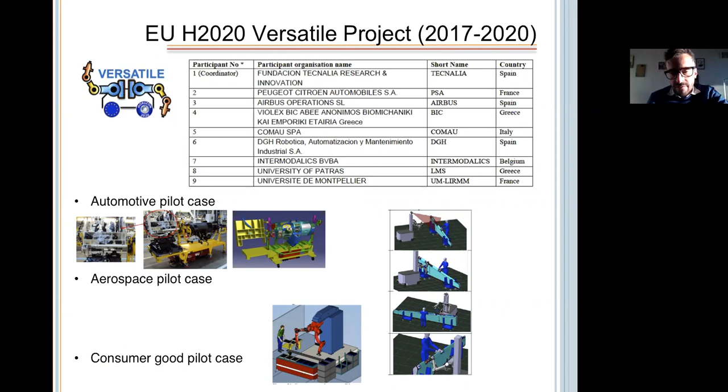In this context, we designed this robot, called BAZAR, which has top-notch sensors and actuators in robotics.

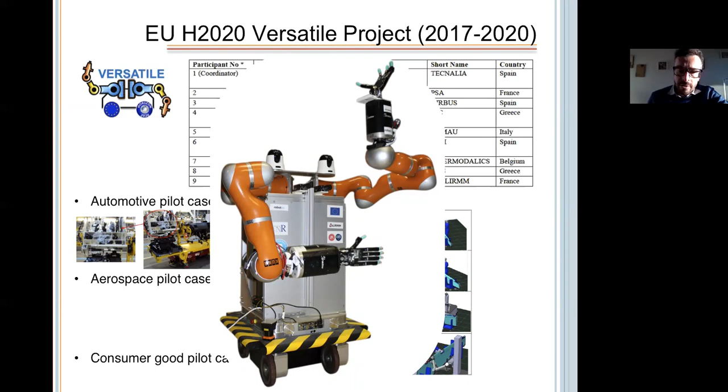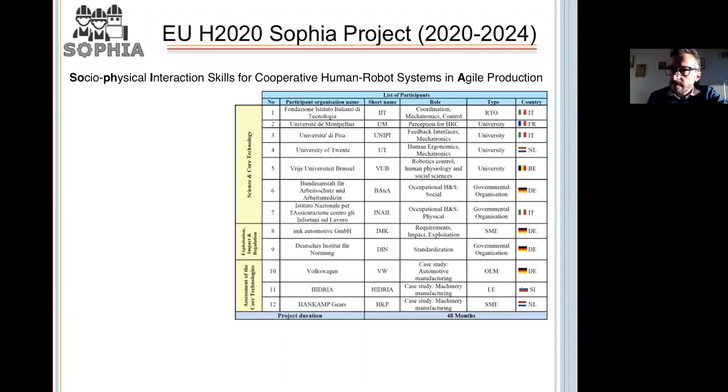Then after that, we had a second European project, which started in 2020, called Sophia. The acronym stands for Socio-Physical Interaction Skills for Cooperative Human-Robot Systems in Agile Production. This project has 12 partners and is coordinated by the Istituto Italiano di Tecnologia, IIT, in Italy. This project is more human-centered than Versatile.

Here the idea is to try to understand when humans have issues at work, such as psychophysical problems, and to try to have the robot help the human in an industrial scenario. So the robot becomes an assistant. Specifically, we address this with 3 kinds of systems: wearable suits which can detect pain, for example, on the human; wearbots like exoskeletons; and cobots, which is more what we address at Université de Montpellier—collaborative robots meant to work with the human. This is a bit of what I will speak about today.

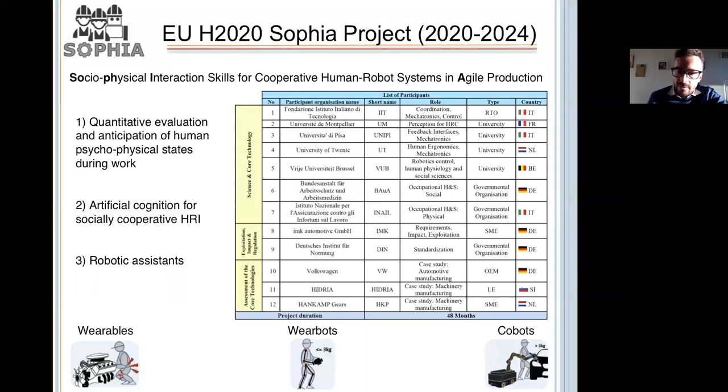So in this work, I will present how we use these devices to enable the robot to manipulate objects and interact with humans. We will show this specifically for each sensor, but we will also show some works where we have used multiple sensors, for example, vision and force together, or force and touch together.

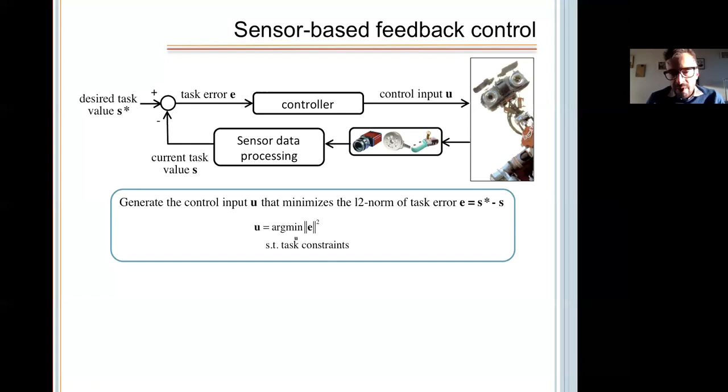It turns out that most of these controllers can be designed by the following paradigm. You just need to generate a control input U, which minimizes the L2 norm of the task error. So your controller should be the U, which minimizes E square under some task constraints. This is a quadratic optimization problem, and it has been recently shown in the robotics community that most problems actually are of this type.

I hope you see my mouse. Otherwise, let me know. And this is the current velocity coming from the robot. And to address this problem,

Of course, in general, you have some constraints here, so the problem is a bit more difficult to solve. But here you can see clearly that this problem is a quadratic programming problem, just as in the blue box.

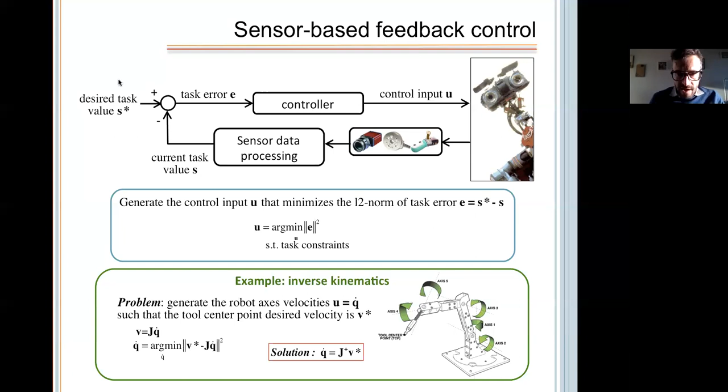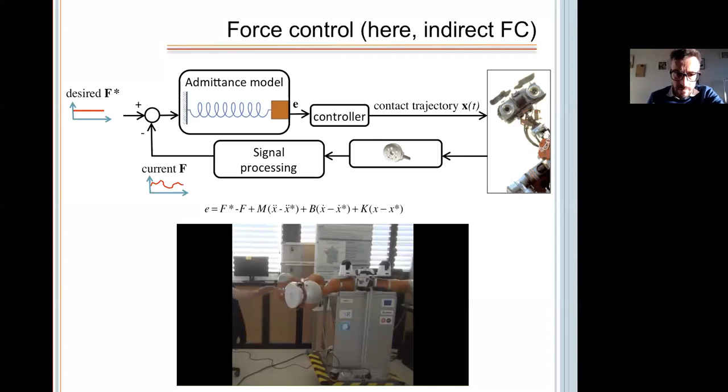And since signal processing with these sensors is very challenging, there are some difficulties: there is a lot of noise, modeling errors. You need to calibrate these sensors when you buy them, and it's very difficult to obtain repeatability. There are often hysteresis and other fancy nonlinear behaviors.

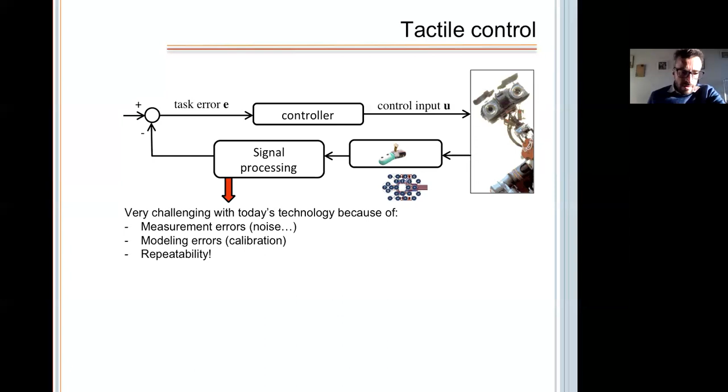So nowadays, if you want to use tactile for control, you would mainly use it to trigger some decisions. I will show some work on this, basically using it as a button for the user. Even for this you need a coarse calibration, but maybe you can just threshold some signal and understand if the person is pushing the button or not.

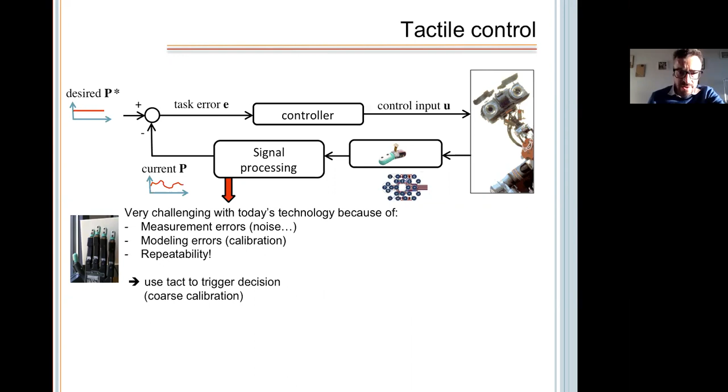But if you want to actually close the feedback loop with a desired pressure, for example, and the current pressure that the finger feels, this is today quite difficult because of the signal processing issues I mentioned. I don't think there are many works that do this today. Instead, what is more commonly done with these tactile sensors is object recognition, for example using machine learning, as I will show later on. This is something we have done in Montpellier as well.

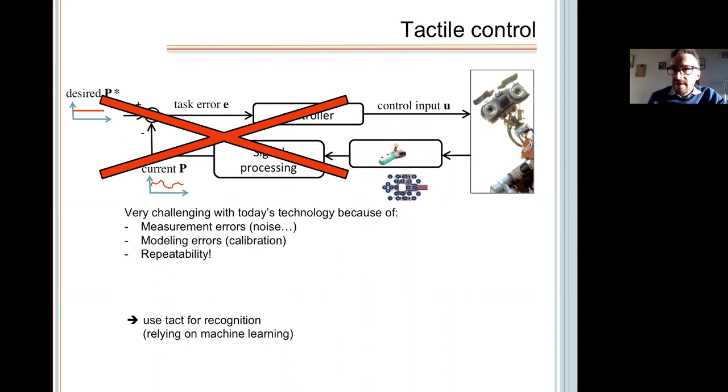Okay, so now let's look a bit - these were the fundamentals you will need to understand my talk. Now I will speak a bit about the application field, which, as I said, for both European projects, Versatile and Sophia, was the factory of the future.

So the factory of the future, the goal is to bring in some robots in the factory, in particular to reduce the ergonomic problems, which are, for example, the back pain and other kinds of stress which human workers feel now. This is a very relevant problem in the European Union because nowadays the highest cost for the health system in the EU is from work diseases, including burnouts, but also a very important part is musculoskeletal problems due to bad posture in the workplace.

So the robot should help the person when they are going to do some bad movements, but at the same time it is not possible, and also not in the intention of the designer, to replace the human, because the human has unique adaptability and precision skills. On the other hand, the robot can bring in power and speed.

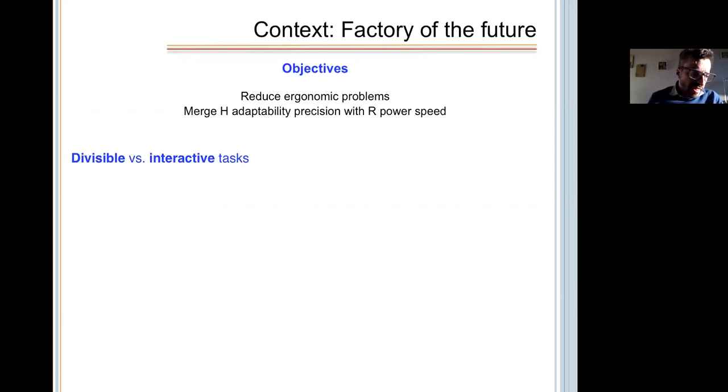So in the factory, we can distinguish between two types of tasks: divisible and interactive tasks. In this drawing, you see it quite well.

On the left, the robot and the human are divided, and on the right, they are interacting. Within this second class, you can also distinguish if there is physical interaction, meaning there is desired or undesired contact between the robot and human. Or you can push this forward and talk about physical collaboration whenever there is desired contact made to achieve a common goal. For example, in the photo here, the person is handing over an object—this is a form of physical collaboration.

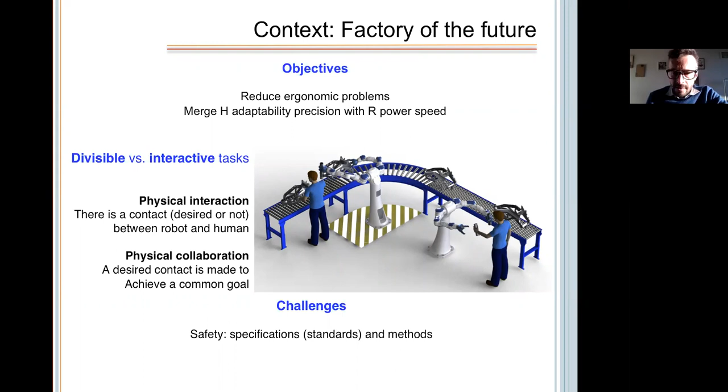In this framework where we want to design such robots, we have three challenges, which are both scientific and engineering challenges. The first one is that you have to have a safe robot. This is really the prerequisite of any robot working with humans or in human environments. For this, we have to follow the standards and design methods which can be accepted by society.

The second aspect, which is very important, is that the robot has to recognize the intention of the human—understand what the human wants to do. This is not trivial at all, because humans are unique, and each human has their own way of communicating and moving and behaving. The robot has to have some patterns which are common enough to understand humans, but not too common. The sensors have to be adapted, and all this has to be done in real time, which is also very challenging—fast, at least quick enough for the robot to act according to what the human wants.

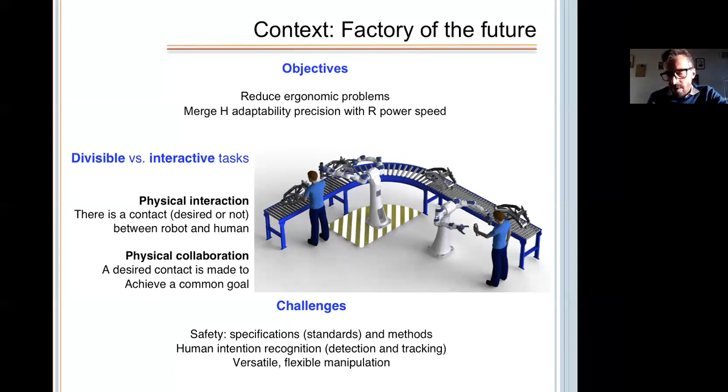Finally, the third important challenge is that the robot in the factory of the future will have to manage many different objects and materials. This is what I call versatile or flexible manipulation, in the sense that it has to deal with a variety of objects and also different materials, including soft materials. I will speak a bit about that research as well. So to summarize, we have three challenges: safety, human intention recognition, and advanced manipulation skills.

I will now focus on each one. To start, I will speak about safety—how we addressed safety at Université de Montpellier. This is a work which dates back a bit. So I will put the sound for this one.

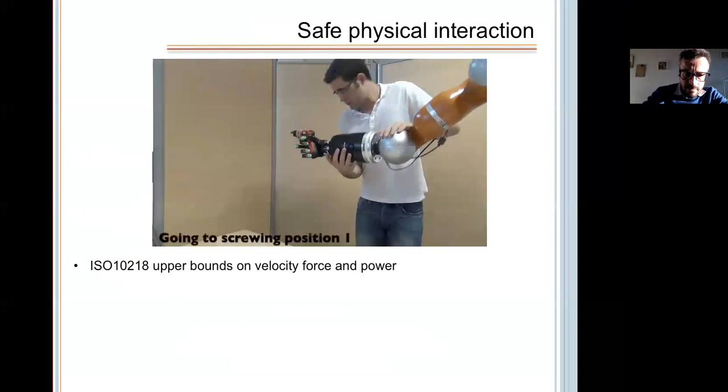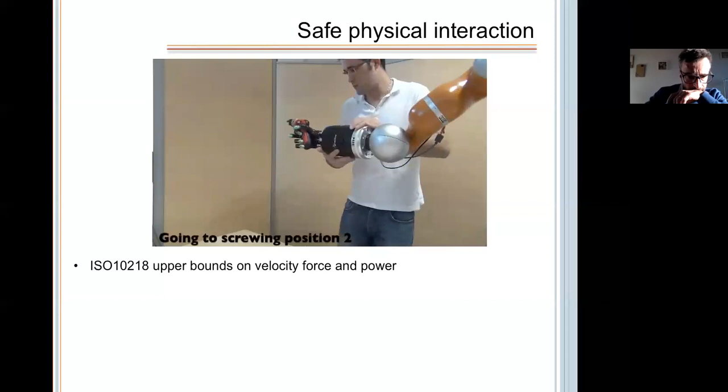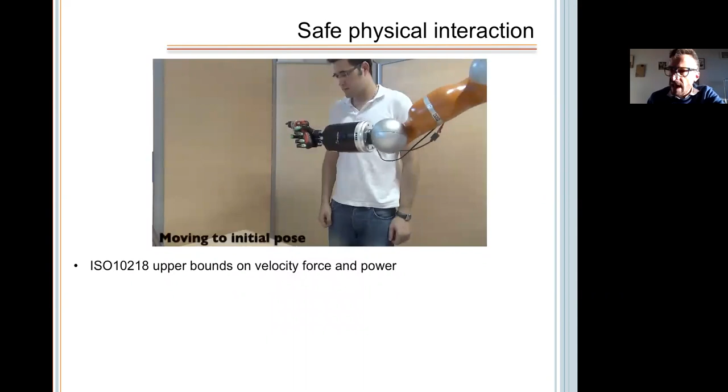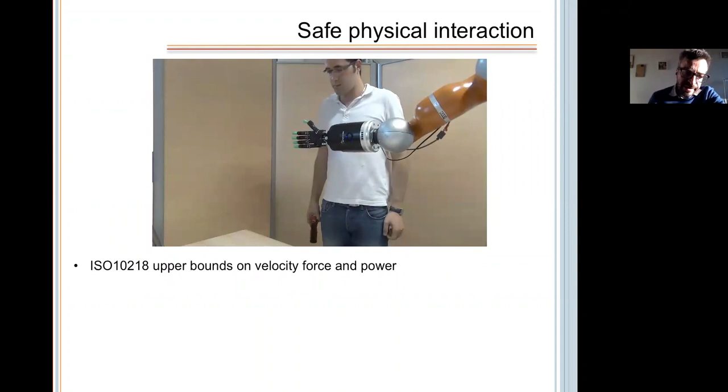Our goal here was to address a standard which is the ISO 10218, which sets some upper bounds on velocity, force, and power for robots interacting with people. To do this, we designed an adaptive admittance controller.

Basically, the idea is the same as in my previous slides, where you use a mass, spring, and damper to control the robot. That's why Benjamin in this video can move the robot, as you saw previously, by pushing it around. But the idea was to have this scalar parameter alpha, which could change depending on whether you had to bound the velocity, the force, or the power—because in some cases, any of the three can exceed the limits fixed by the ISO standard.

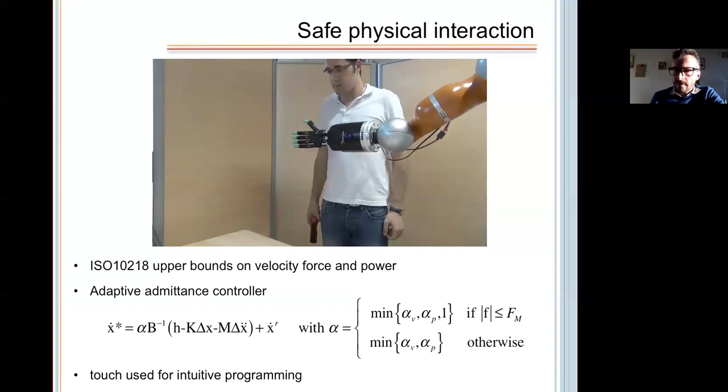Finally, as you saw in the video, Benjamin is using tactile sensing for triggering the different actions. This is a sort of intuitive interface for the human, because he doesn't have to use a sophisticated program or another machine or computer—he just touches the fingers of the robot to tell it how to change behavior. It was a quite simple idea, but then building on top of this, we continued this research.

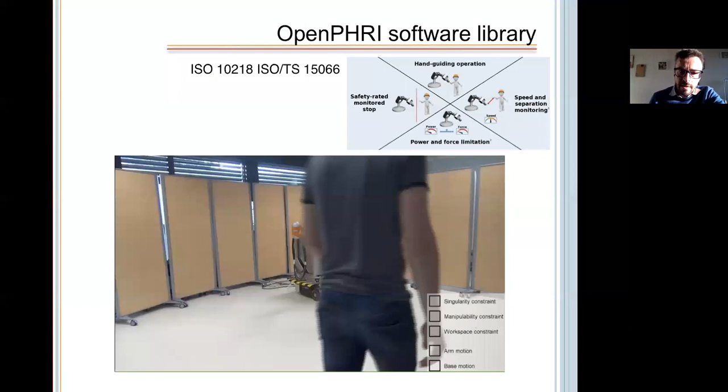Benjamin designed a software library called OpenPHRI, standing for Open Physical Human Robot Interaction. Here he extended this idea of the ISO standard—the figure on the top right is a representation of the standard—but he also took into account the motion of the mobile base.

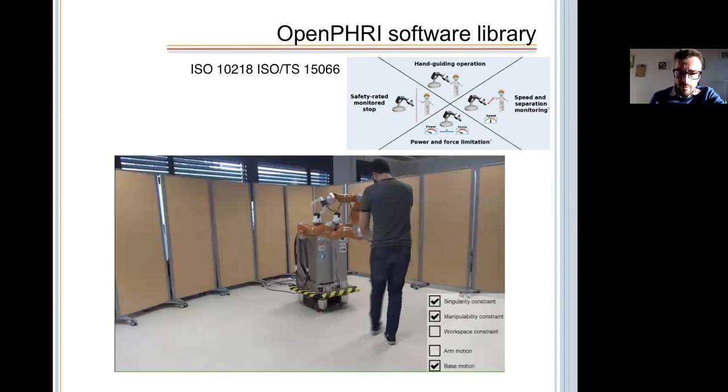So here you have to decide when and how to move the wheels, because in some cases, maybe you just need to move the arm. In some cases, you just need to move the wheels, like here. And in some cases, you need to move both.

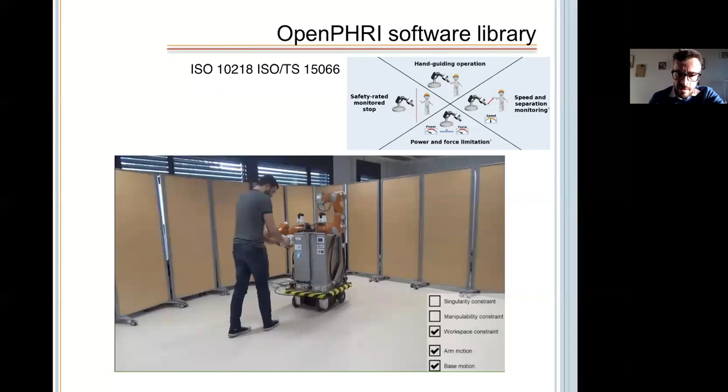As you see in the bottom right of the video, this was represented in the form of constraints which you put into your quadratic programming. So again, it's a quadratic optimization, with constraints that turn on and off depending on the situation—singularity, manipulability, and so on.

So this was a bit the kind of things we looked at for the safety aspects to fulfill the standards in the literature. Then let's move over to the second challenge, which is understanding what the human wants to do.

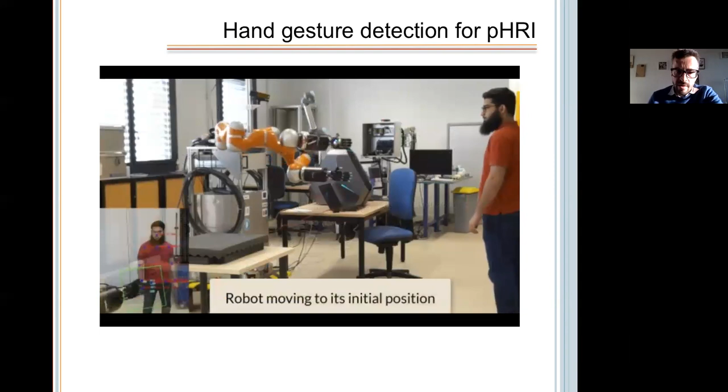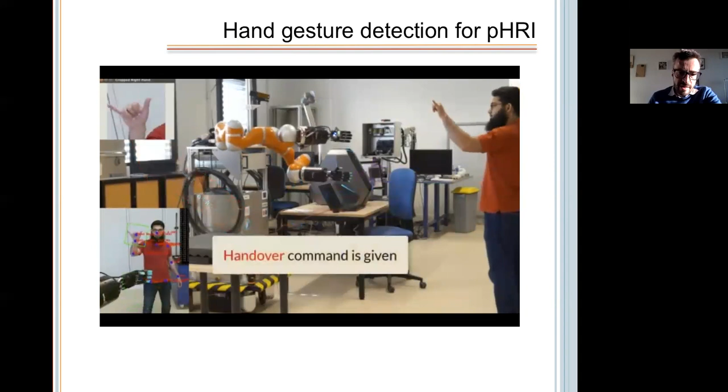This is the work of Osama Mazhar, who finished his PhD a few years ago. Osama was trying to control a robot using hand gestures. Here you can see Osama doing a sign in the top left of the video, and the robot can recognize this sign and knows it corresponds to the handover command. So it will prepare its hand to receive the driller from Osama.

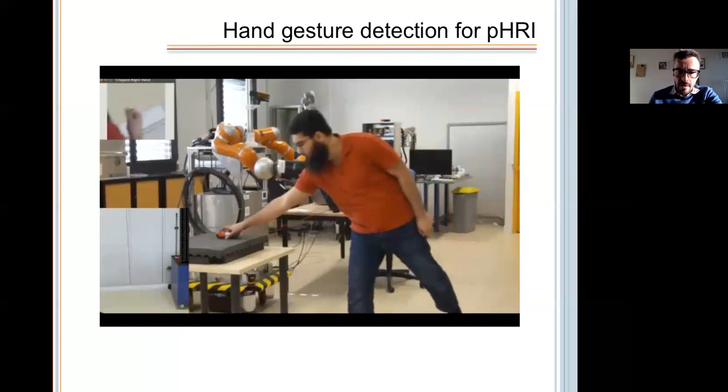And the same sign is another handover. All the signs that Osama was using were from the American Sign Language, so it is a standard way of sign language. And he was using OpenPose.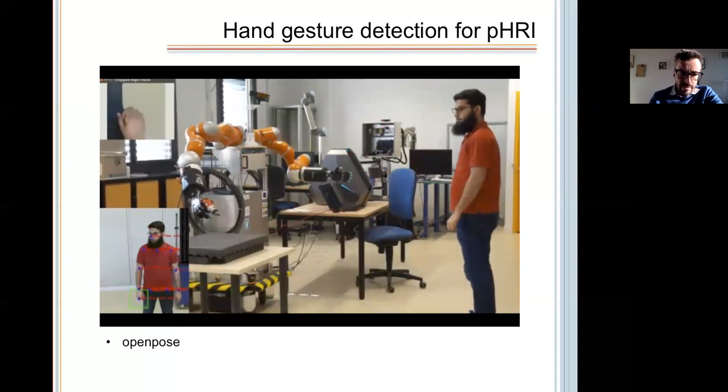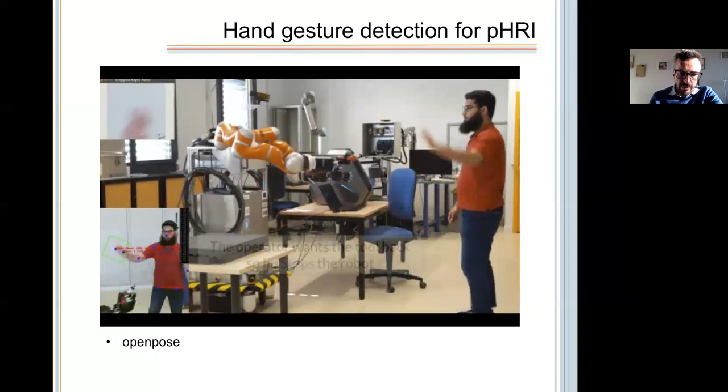OpenPose, maybe you're aware of this, is a skeleton detector designed at Carnegie Mellon University, very useful to find the skeleton of a person using only RGB color images. First he detects the skeleton - it's the bottom left video where you can see the blue dots corresponding to his joints. Then he builds a squared region of interest, which is green, to find the hand of the person.

And for the hand, he started from a pre-trained convolutional neural network, which is Inception. Then he kept training it in the lab with a data set from the people in the lab on the American Sign Language.

Finally, the system was integrated in OpenPHRI. This could enable using it in real time and also with all the rest of the safety criteria used within OpenPHRI.

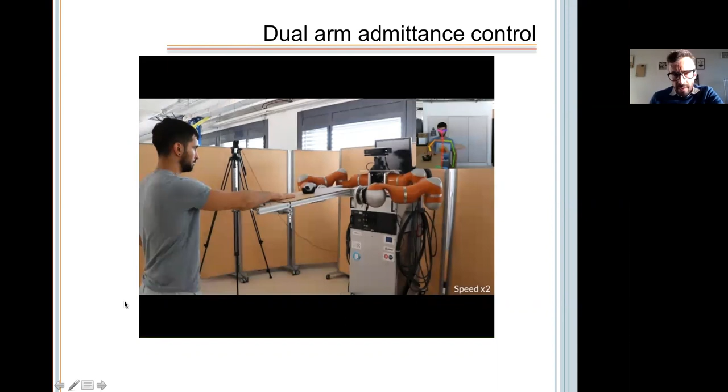So intention can also be found in terms of force, not only with vision. Sonny Tarbouriech, who did his PhD with us and with Tecnalia, the company, was using force and vision to control this robot, which has two arms.

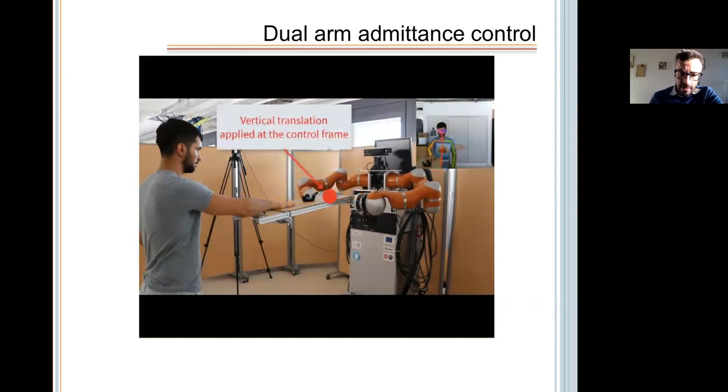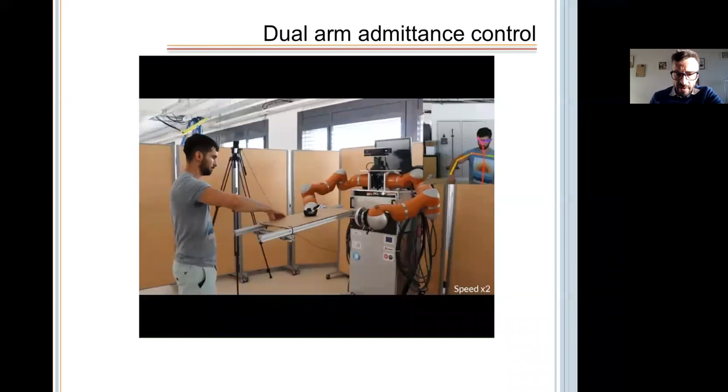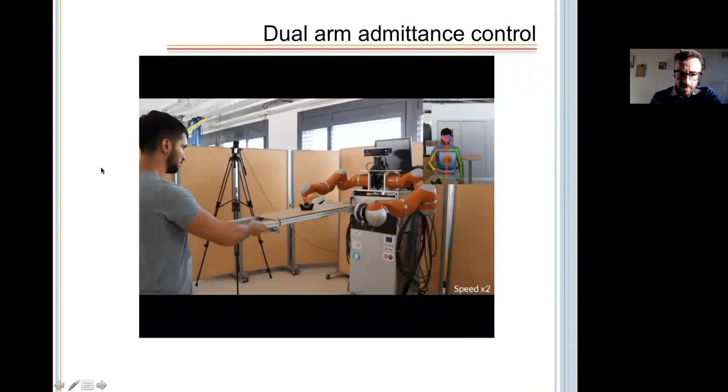When you do admittance control, a very important aspect is to understand where the person is applying the force, because you don't have a measure on the table, for instance in this example, but the measure is only at the end effectors, here where you see my mouse. So there is a lever effect - you don't know exactly where the person is applying the force.

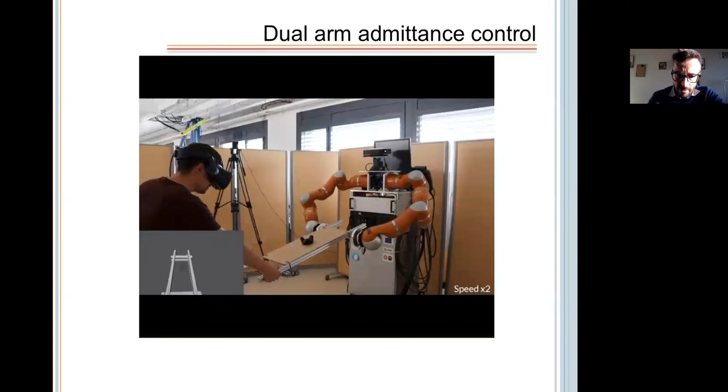And that's why he was using OpenPose to find the skeleton in the image. If you don't know the interaction point, it becomes very difficult to do this operation. Here you can see users doing it without the robot knowing where they are pushing.

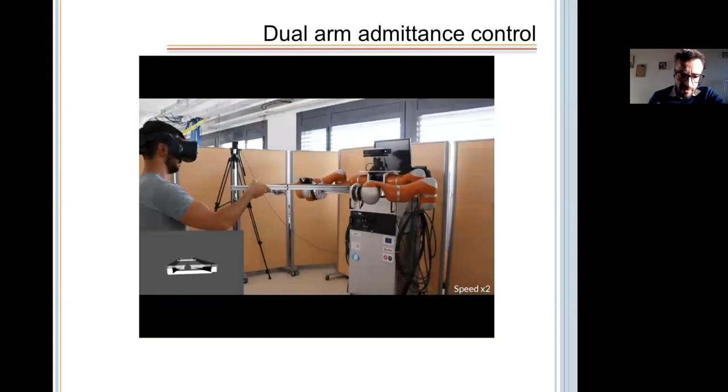So they also have a virtual reality system to drive the task. The virtual reality is just used to tell the person where it should put the table here. And you can see they're struggling a bit.

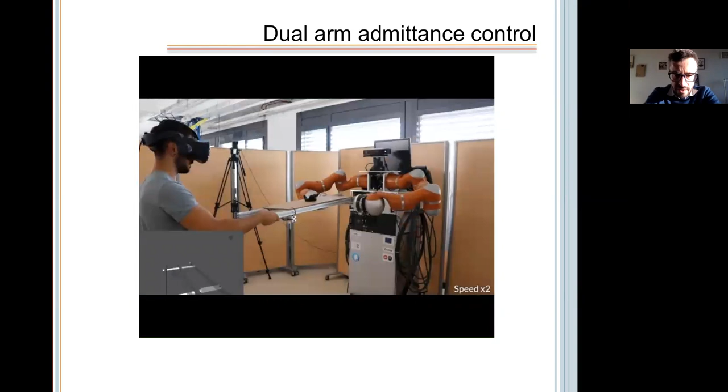The novelty also in this system is that the system has dual arms. This is going to bring up a bit the follow-up of the presentation today. Instead of just using one arm, Sonny designed a representation of task for bimanual cooperative operation, which was quite novel, in particular for admittance control.

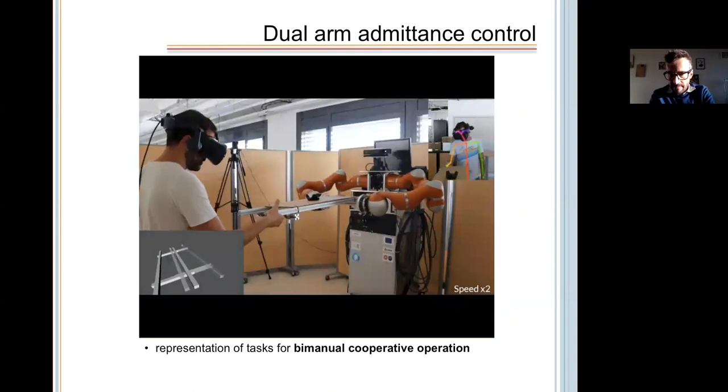So the two arms are controlling admittance, but in a cooperative fashion. I will explain better later. Here you can see when the robot knows where the person is applying the force - this is thanks to OpenPose, on the top right of the video.

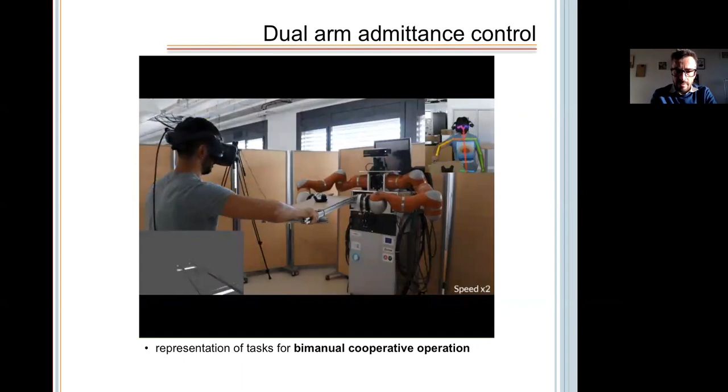Then everything is smoother, and for the users it's much simpler because the robot knows when you want to do a vertical translation or a rotation. It can tell because it knows the application point of the force.

So Sonny also developed a hierarchical quadratic programming system to control both arms and also the wheels. This is kind of the follow-up of the OpenPHRI library, and it's another library which is the one we are using the most now, called RKCL. As I mentioned, he also integrated OpenPose to estimate the contact position of the person in the robot workspace.

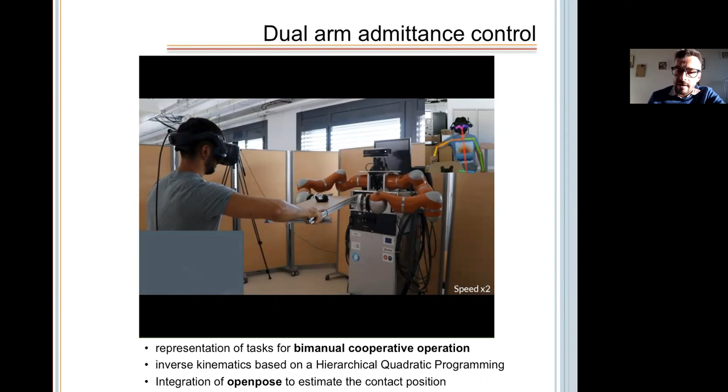Now we'll move over to the next part, which is versatile and flexible manipulation. The first work was from Zineb Abderrahmane a few years back. She looked at zero-shot haptic recognition.

So if you have traditional multi-class classification in machine learning, you show a classifier a few objects like a bottle, an apple, and an orange, and then the day the classifier sees a bottle again, it knows it's a bottle. This is common in image processing nowadays.

But the problem is that in real life, or also in the factory for example, you have many daily life objects, and you cannot train your classifier on each one of them. Maybe one day you have a new object and your classifier is not ready yet.

So the very nice idea in Zineb's thesis was to do some zero-shot learning, which is common in image processing, but not in haptic or tactile systems.

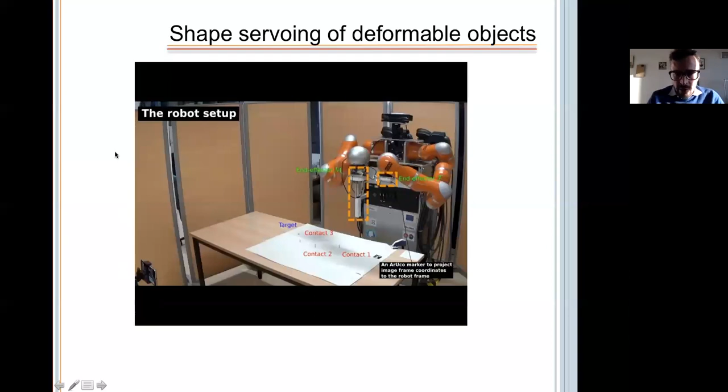So one of the pioneers in this is David Navarro, as you may know. And Jihong Zhu, who also was in Poly Hong Kong a few years ago, hosted by David, looked at how to reproduce this kind of task, which is done in the factory, so to place a cable along contacts.

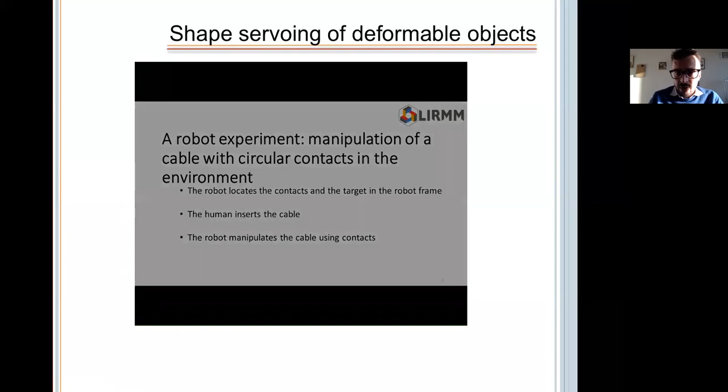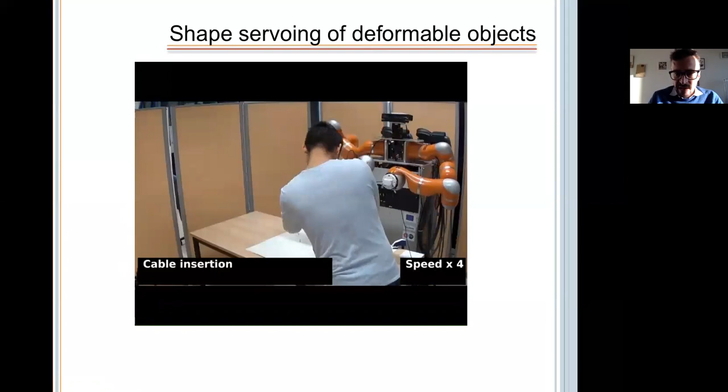And he designed this particular tool for the right hand of BAZAR, which was capable of letting the cable slide or also block it if you push against the table.

So here you are letting, you can pull the cable and then sometimes you can fix it. It's quite an ingenious mechanical system.

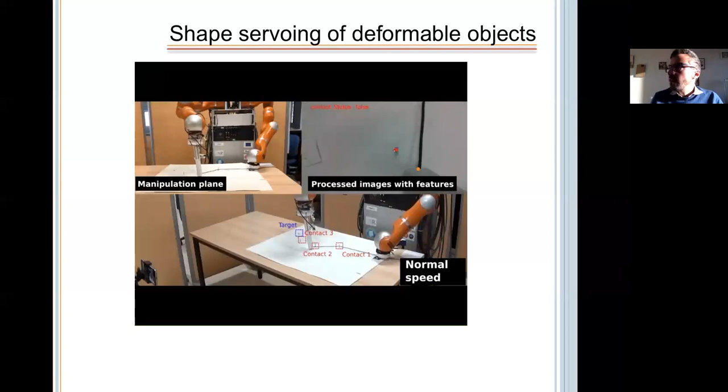And here you're using an eye-in-hand camera. There's a camera here, a RealSense, which is mounted on the tool, which lets you see very closely near the cable tip. And just using this image processing system, we can, and also with a particular formalism.

So Jihong designed a contact mobility index, which was a metric to tell whether the contact was constraining the cable or not. Depending on this index, the robot would pull the cable or turn the cable, alternating between two actions. So this is a very simple planner with vision-based control also integrated within it.

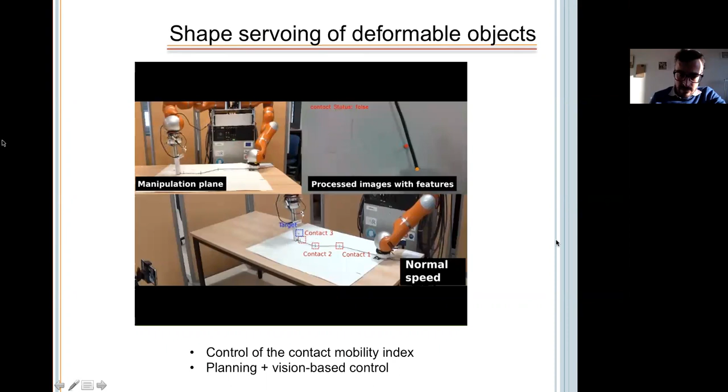So this was followed up by some work with Celia, which is very recent actually. Celia is doing her PhD thesis in the context of Sophia. So she, here you can see, I just put a pause.

And for some things, you don't really care about the absolute task. For example, if you want to hold an object in the air, what is really important is the relative task, because you don't want to drop the object. And so knowing this can release some degrees of freedom, which is very important for such a redundant robot to have extra degrees of freedom.

So this is a bit the framework where we worked, and she integrated also work from Jihong, which Jihong did when he was in Hong Kong. So here she's using a depth image, which is a novelty with regards to what Jihong was doing, to get the contour of this object.

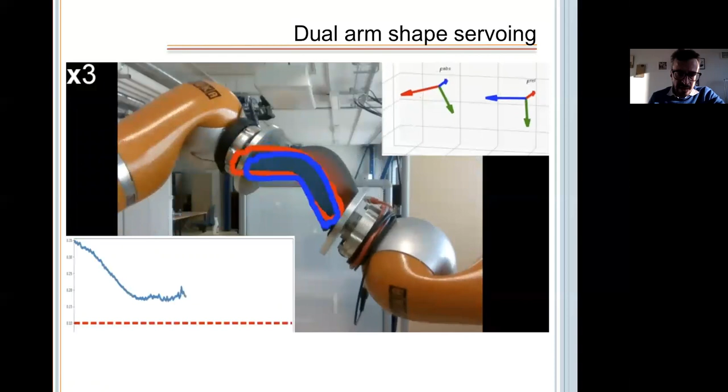And using principal component analysis, she extracts the relevant features of this object and then uses this to control the two arms of the robot. So it's a bit of a follow-up of things that we had been doing with David Navarro and Jihong Zhu, but extended to this dual arm, and also to a three-dimensional object where you also have a point cloud and not just an RGB image.

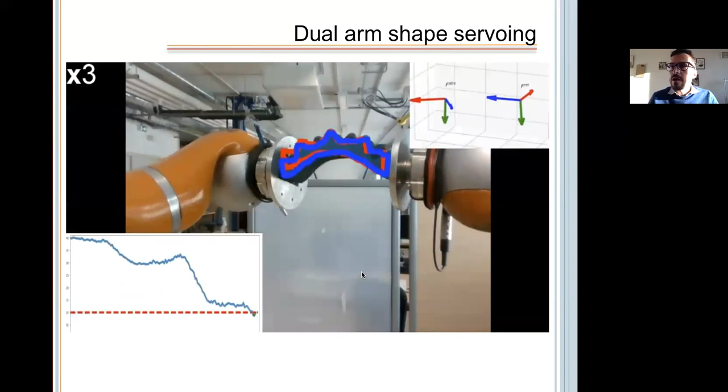So here you can see in blue the current shape of the object, and in red the desired shape of the object. And here she's also doing it with a rigid cardboard.

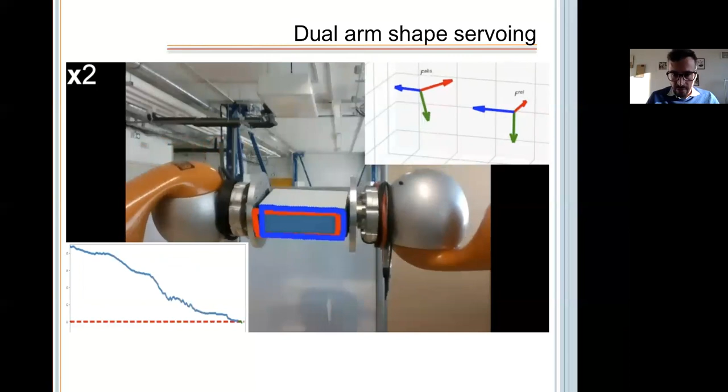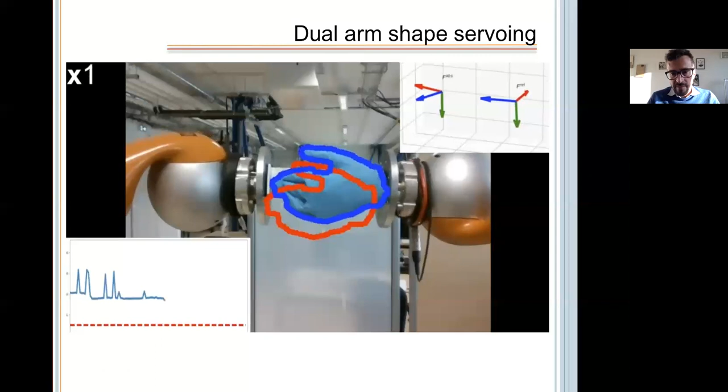It's also, again, interesting to understand that you don't necessarily need the absolute task for such problems. Sometimes you just want to deform the object, but you don't care about its position in space. And that's where we think that this kinematic representation is better than a traditional one, where you would control everything.

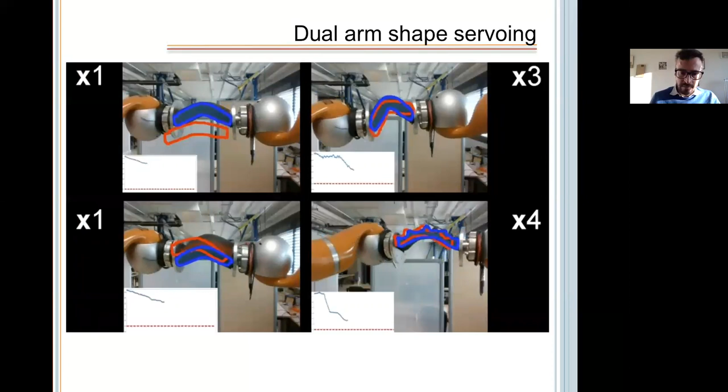And these are other experiments she did. This is another work also on soft materials. It's work I did while I was on sabbatical at QUT in Brisbane, Australia, working with Peter Corke and colleagues. And this time I was looking at plastic materials, so molding, for example, flour or sand like this.

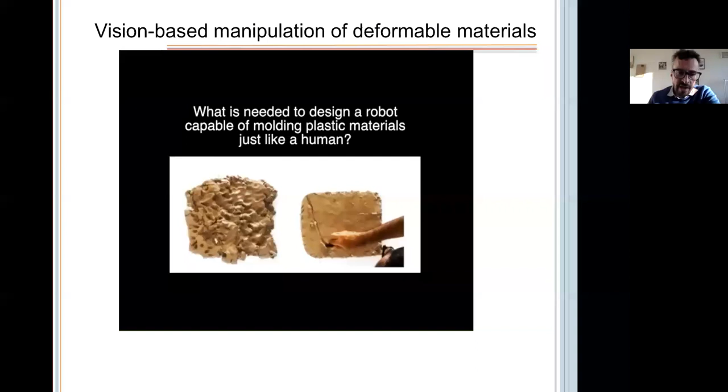So first of all, we wanted to understand how humans do this. So we built a data set where people were shaping the sand, and we filmed this behavior. Then the purpose was to use this data set to control a robot, and also compare three alternative control strategies for the robot to do this itself. And we showed that it converged to a desired error in all cases.

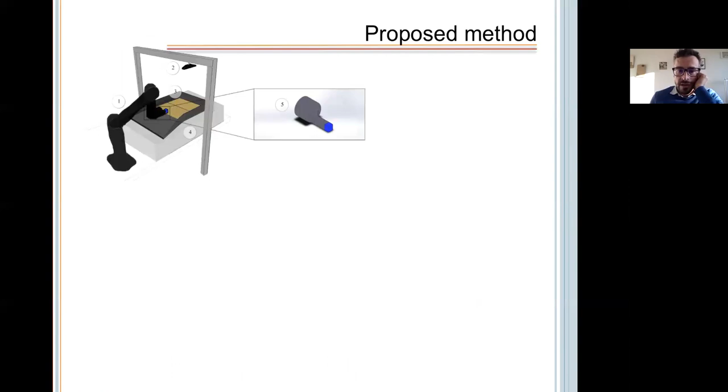So the proposed method is to use such a fancy tool to deform the sand, and the goal is to obtain a desired image. So again, it's a quadratic programming problem where the robot should apply some actions. And we had some hypotheses about a feasible shape, and we were looking at just two actions, a pushing and a tapping action.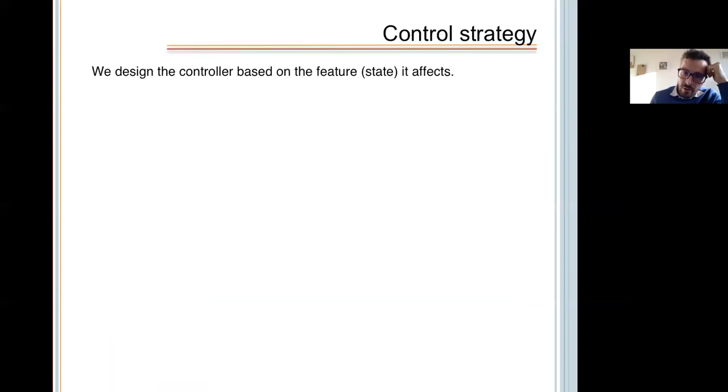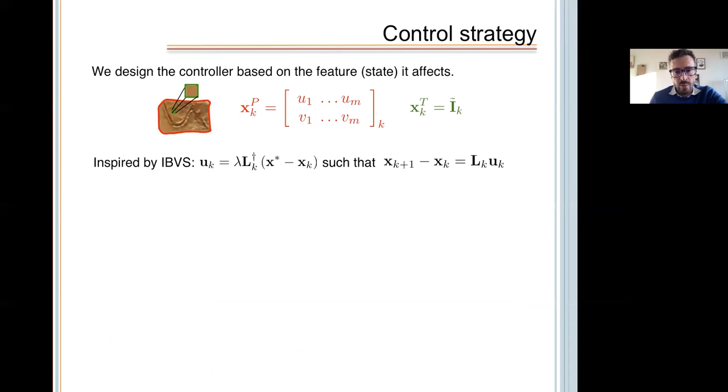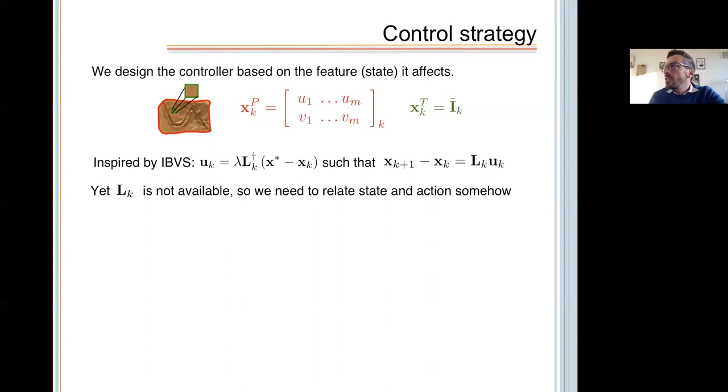So the control strategy, ideally we have a feature, we have a state vector, and we could use the image-based visual servoing, the one I showed you in one of the first slides. But to do this, we should know this matrix L, which maybe you remember from my first slides, yet this is not available. So instead, we have to find an alternative.

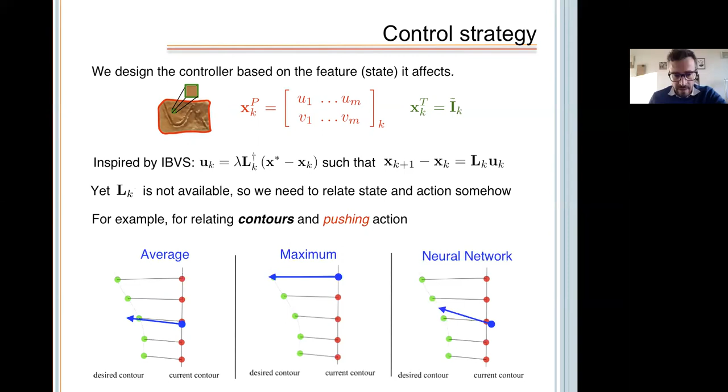So we explored three possibilities: taking the average, the maximum, or a neural network to understand how to move the robot, looking at the current and desired contour. So we designed this neural network first.

I will probably go a bit fast on this. So basically, we took all the images in the data set, we segmented them to extract primitive motion. So this is the motion a person does while pushing the sand.

Then we take pairs of these contours. These will be input to our neural network. I want to go from this contour to this contour, which action do I need? And of course, I have the labels because this is the ground truth, the beginning and end of an action. Then I can train this neural network to predict which action is necessary to go from this contour to this contour, from the blue here to the blue here, how do I have to move my robot?

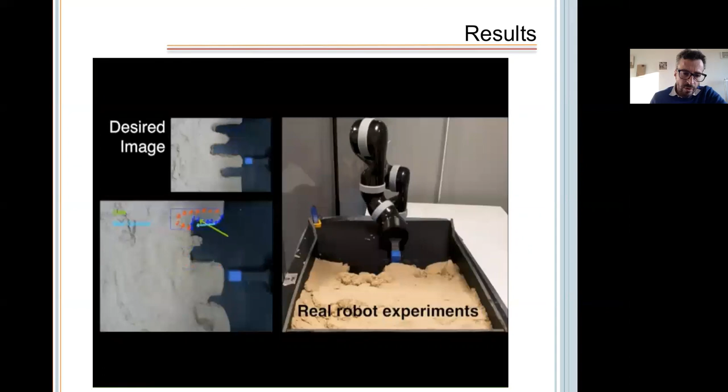And the results are shown in this video. So here, the robot has to obtain this shape, moving the tool around to obtain it. It has different options with the 3 techniques I mentioned: it can take the average of the 2 contours, the maximum of the 2 contours, or the neural network, which was trained with human data.

So these are the arrows that you see, the green and the cyan arrow. And as you can see, it eventually converges to the shape somehow, which is desired.

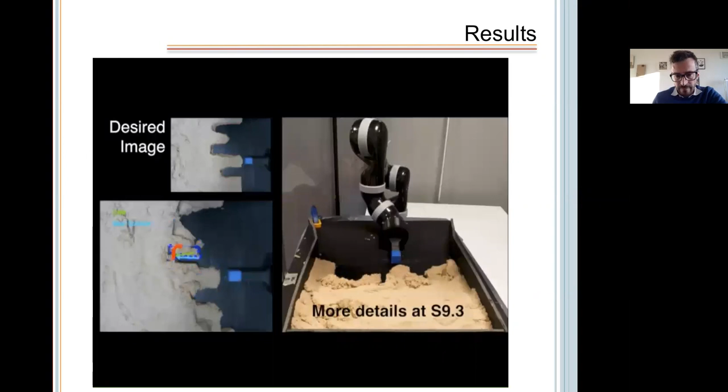So we did benchmark this with 3 shapes like this, and we obtained results which were not too bad, considering that the robot does not have a point tool, but a square tool.

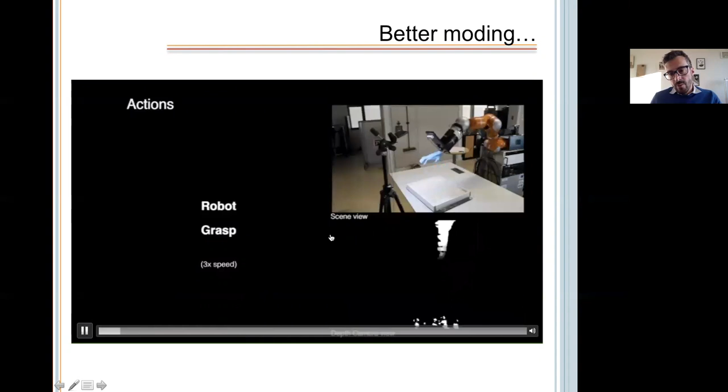I will skip this, maybe I can just show it quickly. This is the follow-up of that work. We looked at how to do this with a hand, and this is a work in progress - we haven't submitted it yet. Basically, we are doing a similar thing with the hand: we try to predict what happens when we do an action with the hand on this sand.

Then we have a planner which plans how to go from the initial shape to the final shape, so which actions it should take. For this, we use convolutional autoencoders to train the system to predict the final shape.

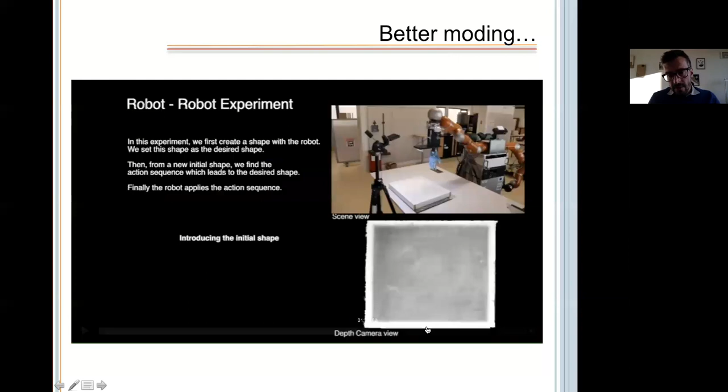And the results are shown - I'm going a bit fast. So here the robot is applying various actions to obtain a desired image, as you can see here.

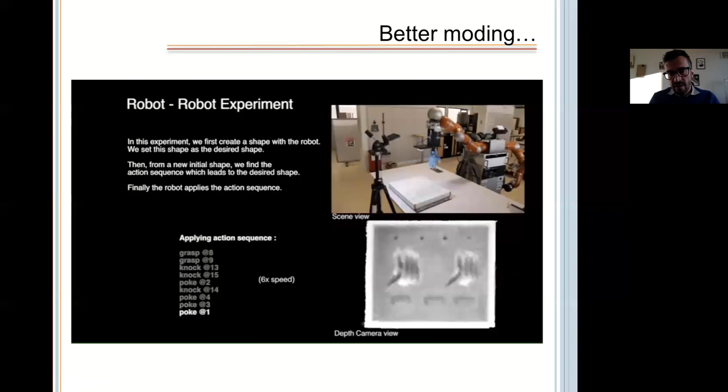So I will conclude now because it's time. I showed you a bit of these three problems. My conclusions will be more oral and maybe in the question time, but roughly I would say that safety, we're not at all far from reaching it. I think you already can see robots in the factories, because most things have been dealt with also using admittance control, or even better torque controlled robots like the Franka Panda.

Human intention recognition is really an active field right now. I think there's work to do, but OpenPose, the system I showed you for recognizing the skeletons, is very useful. But before we can actually use this in a real environment, there's a bit of work to be done, in particular to deal with noisy and unreliable sensors and managing this in real time.

And finally, what I showed you about manipulating soft objects or recognizing objects never seen before, I think is more fundamental research for now. So I would say this is more something which will maybe or maybe not work in 10 years or so.